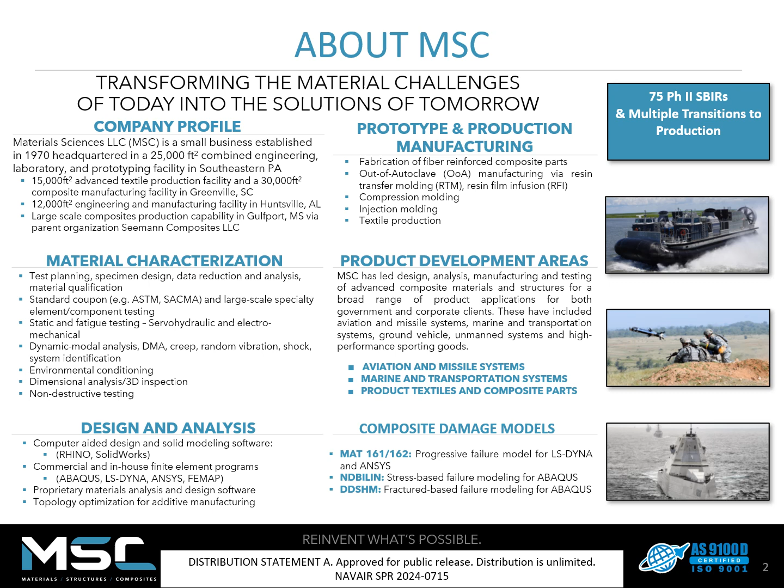production manufacturing. We have 45,000 square feet in Greenville, South Carolina for specialty textiles and composite production, as well as 12,000 square feet of engineering and manufacturing space in Huntsville, Alabama. As you can see on this slide, we have a wide range of capabilities and many examples of successful product transitions.

MSC is pleased to have been awarded an opportunity to work on this Navy challenge, which focuses on streamlining composite repair processes using a novel, lightweight structural filler formulation. Our goal is to reduce the time required to perform a honeycomb repair on a sandwich composite. As I'm sure many of you are aware, this is currently a long process, particularly if core splice is required.

The target metrics are shown below, with the key focus being on a 1-hour time to sand and an 8-hour cure profile without external cure equipment. And that's very important. All of this is ambient cure work.

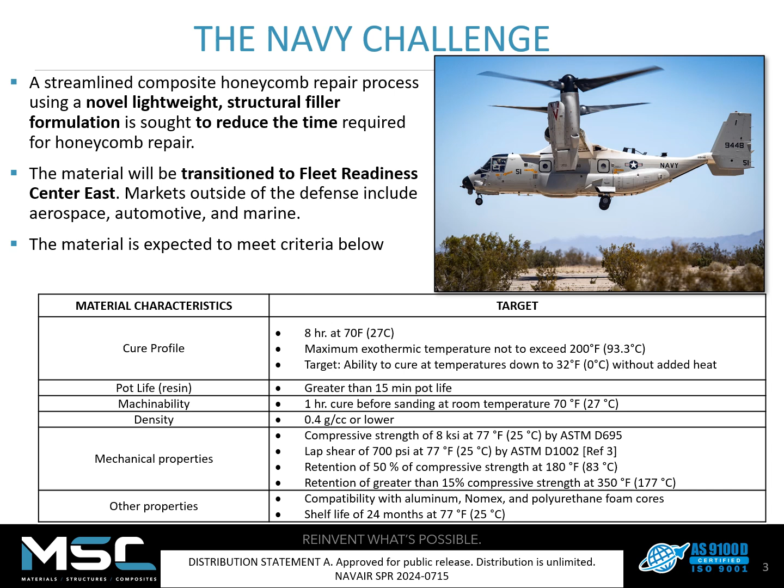So let's talk a little bit about why the project is important. For operational use, system maintenance is a critical focus area for both operational tempo and platform lifecycle costs. When you think about a sandwich composite structural repair, and sandwich composites exist all over high-performance platforms such as in fixed wings, rotor blades, flooring, wall panels, refueling booms, all over.

There are lots of different considerations, such as the adverse effects on mission readiness, the time to repair, the labor involved, and the downtime of the asset that come into play when we talk about these structural repairs. MSC's technology can cut down these adverse effects by 70%. And that's why this repair material is so crucial. We're saving hours in the repair process, which translates to a significant cost savings.

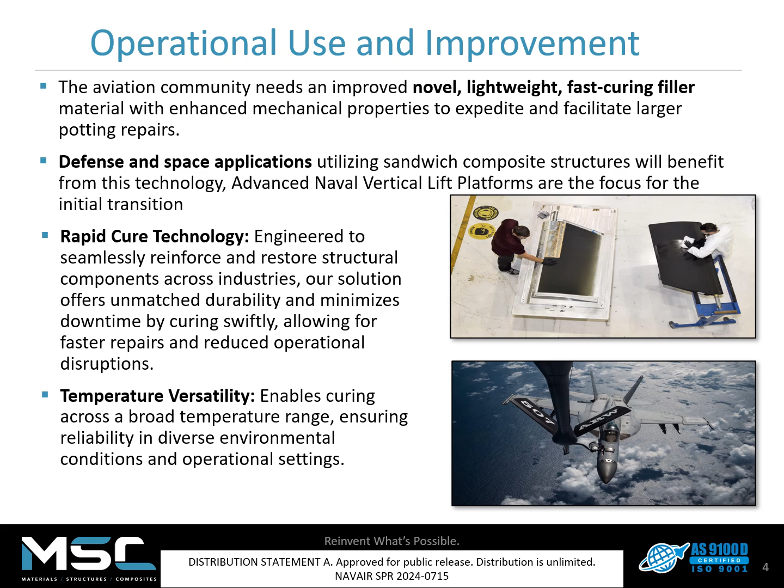And those cost savings are the result of a ripple effect. Time saved during cure and potting enable faster reskinning, which enables the artisan or technician to perform more repairs during their shift. Additionally, the temperature versatility means that repairs can be performed outside of conditioned repair depots, so they can be performed on the component where it is without relocating.

Building off that understanding, we can talk about MSC's solution. MSC's low density and quick curing honeycomb filler enables a 70% faster repair. This is achieved with a 1-hour time to sand versus 8 hours in the baseline. It's fully cured within 24 hours, and it's a drop-in replacement to the current repair procedures, so there's no adjustments needed to current operational procedures used by artisans and technicians who were performing repairs, or even fabrications for that matter.

It's self-extinguishing, and that added fire retardancy enables the material to be used in places the legacy material wasn't able to. Finally, the system cures even at very low temperatures, which makes it a valuable solution for field and battle damage repairs.

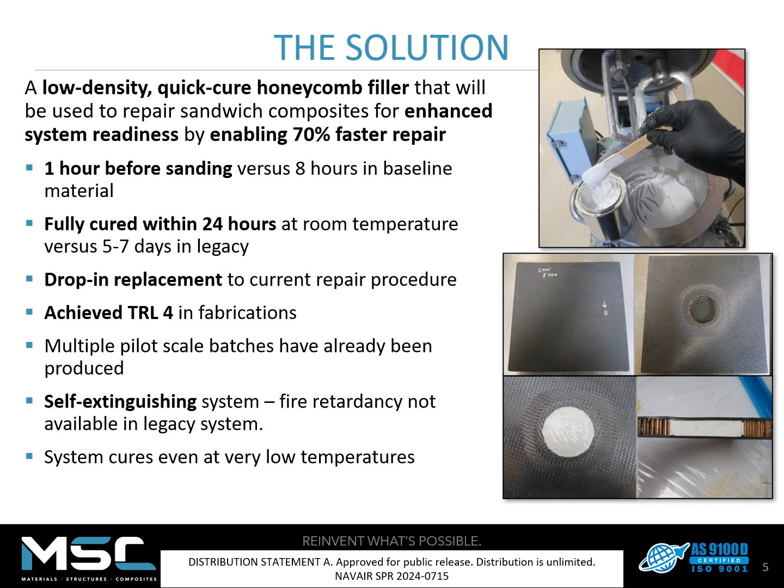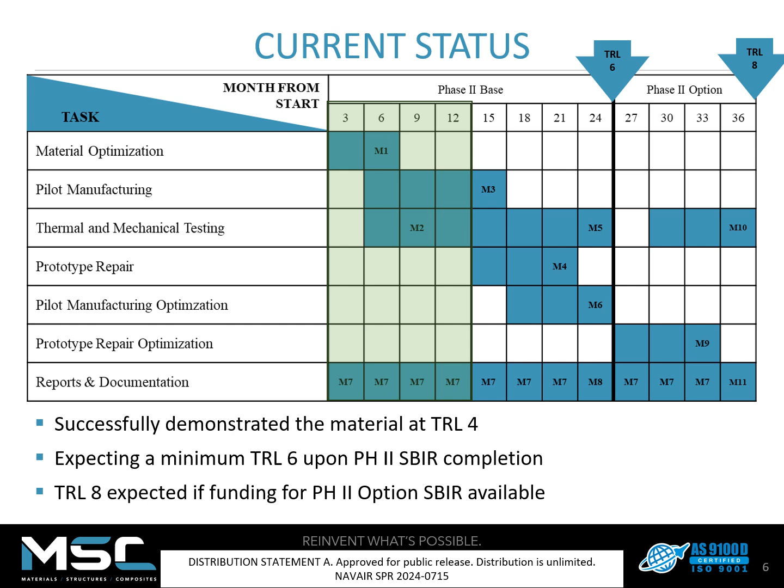As with any material development, it's critical to plan the technology maturation dates in order to better transition the technology. We fully understand that an excellent technology does not benefit our service members unless it can be produced at scale. As you can see, MSC has already achieved TRL 4 and expects a minimum of TRL 6 at the completion of the Phase 2 effort. If a Phase 2 option were to be awarded, MSC expects to further the technology to TRL 8.

Here's a look at the data comparing MSC's repair solution with the systems currently approved by NAVAIR guidance. It clearly demonstrates the significant reduction in maintenance or fabrication time, again with that 1-hour time to sand versus an 8-hour time to sand in the legacy materials, as well as a demonstrated 20-hour cure time versus 5 to 7 days in the legacy materials.

Additionally, the lower exotherm temperature of 104 Fahrenheit means that large quantities of resin can be mixed and used, thereby enabling larger repairs to be performed without negative exothermic reactions. And so the current demonstrated repair increase is 50% greater radius.

Other benefits, again, include that 32-degree Fahrenheit minimum cure temperature, so that enables field repairs in a variety of ambient conditions. Room temperature compressive strength above 10 KSI, and that added fire retardancy, which will enable the materials to be used near high operating temperature components.

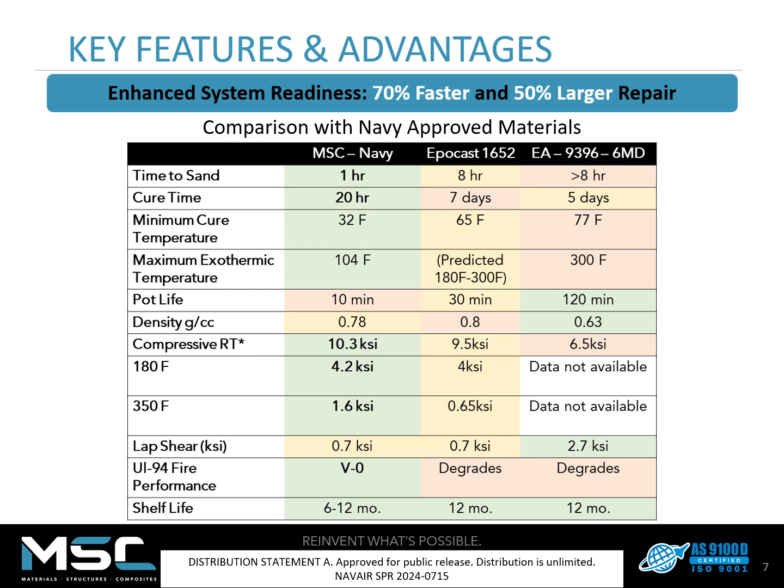In order to transition this material beyond Phase 2 to the fleet, we're looking for partners and advocates in the FRC and the primes who can specify the material into their repair guides. We expect our primary transition advocates to be those maintaining the fleet, such as depot teams, primes, and suppliers. Others that will likely advocate for the adoption of this material are fleet commanders and squadron commanders who are waiting for their assets to be returned to the field.

The initial transition platforms expected are advanced naval vertical lift platforms like the V-22 Osprey and the CH-53 Super Stallion. But many other platforms will benefit from a material like this, including fixed wings such as the F-18 and the F-35.

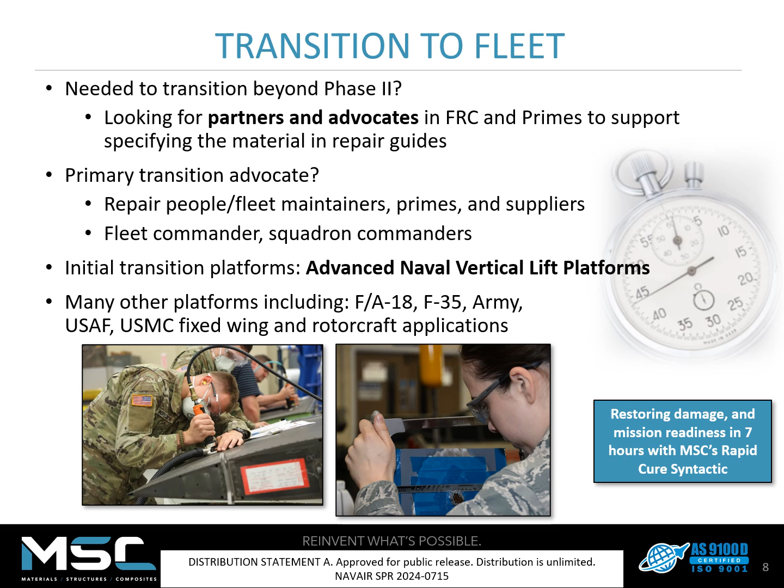MSC's market analysis indicates that a wide range of applications would also benefit from this material, including commercial aviation, space platforms, both commercial and defense, as well as high-performance sports, marine craft, ground transportation, green energy like wind turbines, as well as construction. We expect interest from many of these markets due to the increased profitability made possible by the rapid curing system.

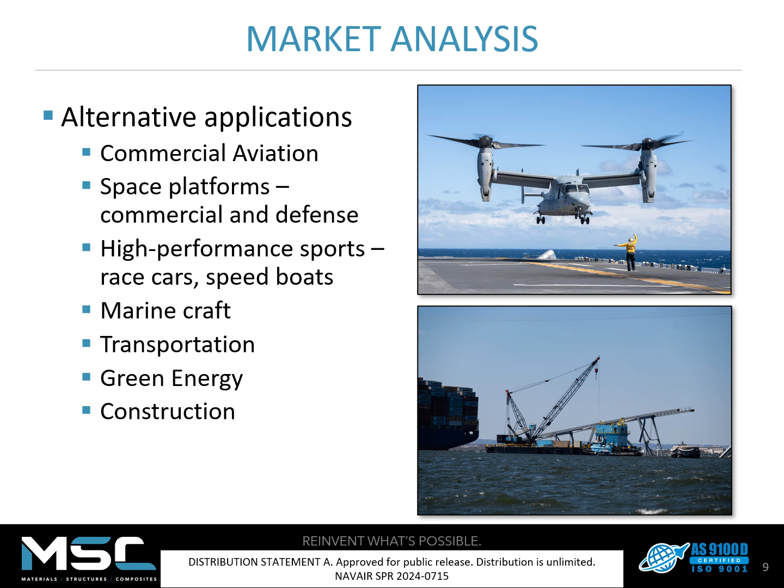As many of you know, the successful commercialization of this project will result in a cost savings for both the Navy and other defense applications using the material due to the efficiencies in scale. MSC plans to achieve this commercialization by producing the compound in-house and packaging it appropriately. In other words, our business model will be direct sales. We're currently seeking support from PMA 260, and in parallel, we're identifying supplemental funding with OEM partners who really want to embrace this innovation.